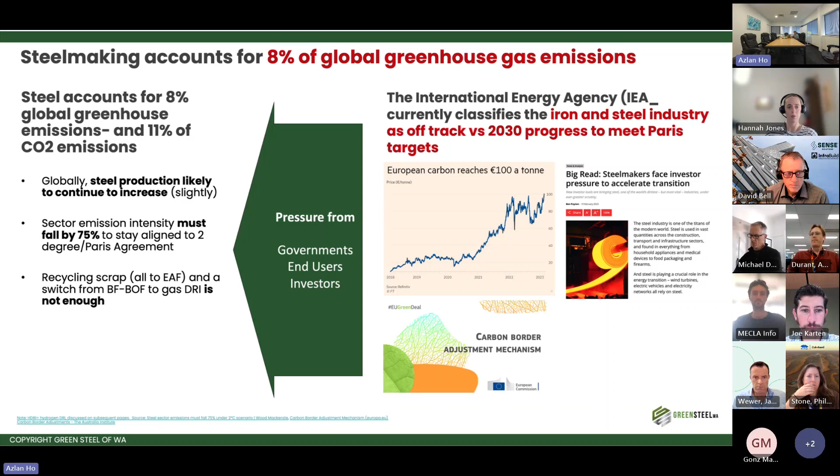I think everyone on this call is pretty much here for the same reason, that steel is a fairly significant contributor to global CO2 emissions, and it's a very difficult area to fully decarbonize. So I think we're all here because we agree that something needs to be done, and it is a challenge. So I probably won't spend too much time on this.

The other interesting little fact is that Australia actually plays a significant role in global CO2 emissions. We're the largest exporter of iron ore in the world, and our iron ore actually results in over 1 billion tons of CO2 production every year.

One of the interesting things was, I think, one of the large iron ore producers in Australia potentially produces more Scope 3 emissions than the LNG exporters, or a comparable amount. We're very focused on Scope 3 emissions from the resource industry, but it's interesting that the Scope 3 emissions from iron ore aren't that far off from Scope 3 emissions from gas exports.

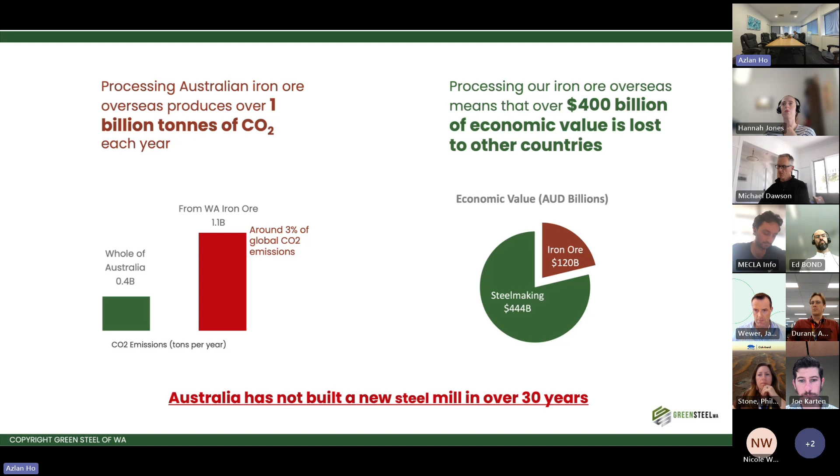But maybe on the other side, it's both a problem and an opportunity. The $100 or so billion of iron ore that we export every year becomes $600 billion of steel, which means that someone else is deriving $400 billion of value. So I'm not saying we'll get it all, but even some of that would be pretty significant to the country. And the steel industry has probably sort of stayed the same for a long time, I think for the last 3 decades.

So the next thing I was going to go through was some of the pathways and the ways that we can get to reducing steel emissions. So typically the simplest way to reduce steel emissions is to recycle as much as we can. I know it's not the solution to the whole problem, but the technology is there. You can produce steel with very low emissions through recycling.

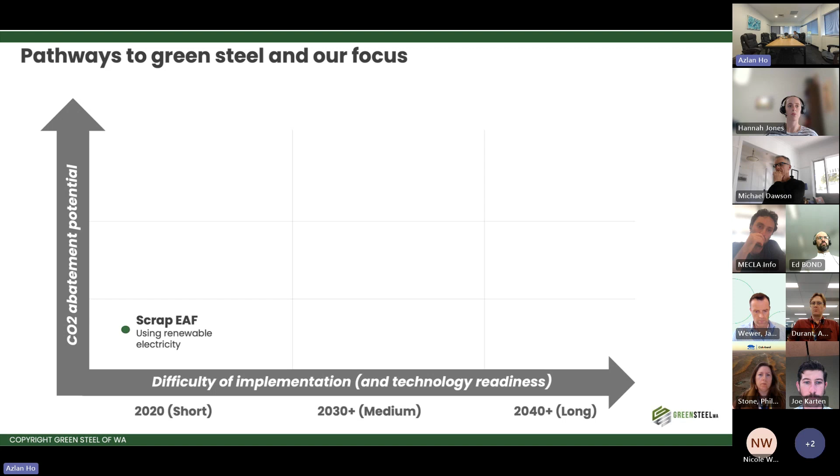And there are other benefits from recycling as well. Besides reducing emissions, you also end up with less mining, less energy usage overall. So again, it's a relatively easy but not a big step. And then the next thing out there is using existing DRI technology, either with gas or hydrogen or CCS in the middle. And that's, again, proven technology. It has the potential to make a bigger impact than recycling, especially in Australia.

But it also isn't the whole solution, because while there are quite a lot of magnetite resources which can be enriched to support existing DRI technologies, it doesn't solve the big Pilbara problem, which is the nearly 1 billion tons of hematite that we export every year. And that comes with the technologies that are coming, like the electric smelting, solution electrolysis that Fortescue and Element Zero are pursuing, and then there's molten electrolysis, which I think Boston Metal and some others are doing, and probably some other ones that we've never heard of, but I think they're a little while away. They're very, very important.

I think they're the solution to everything, but they're probably quite a while away, because they're still at best in pilot stage. Some are not even there yet, and so there's quite a while to go. We think probably a decade plus before they get to a decent commercial scale. So we're currently focusing on the stuff that's already there and done. So we're not here to solve the world, but just to take a step forward and do something that makes sense.

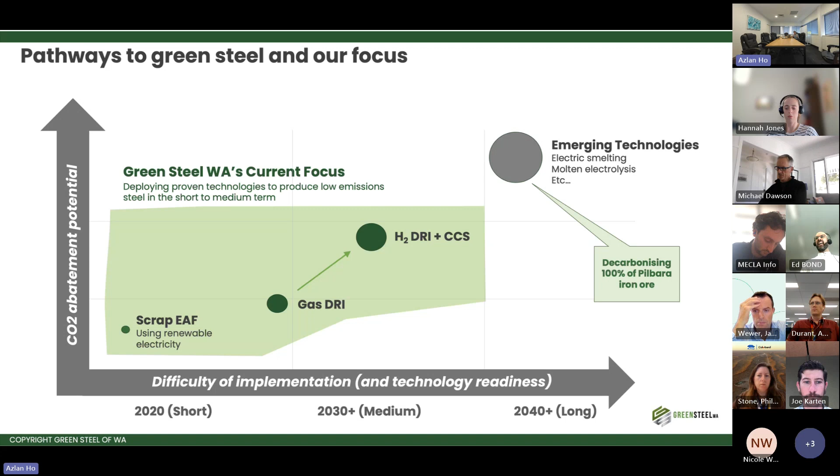I guess overall, all of these things need to stack up economically. So we're working on the principle to find a way to make these work within the current environment, and then to set the scene for the next few things. So off the back of that, we've got our Collie steel mill. That's a 450,000 ton a year steel recycling mill producing rebar in the town of Collie in Western Australia that I'll tell you more about.

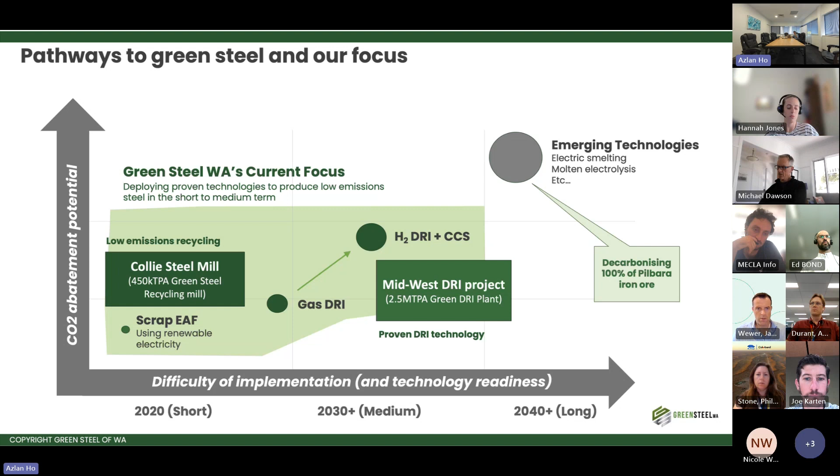And then our Midwest DRI project. Both of these projects, we've been working with Danieli on, using their MIDA mini mill technology and then their Energiron DRI technology. So the first one is Collie. We've been working pretty closely with the state government, who funded a lot of the development of the project. So we're fully funded to FID.

As far as technology goes, it's very new and advanced and interesting in steel terms, but it's also just a copy of something else. So I have to admit, we're not by any stretch a technology company developing cool stuff. We're literally just taking what someone else has done and repeating that. But the converse of that is that there's minimal technology risk, and it's hard enough just to get one of these off the ground without technology risk. I can't imagine trying to do this with technology risk. I don't think I'd survive.

Being an electric arc furnace mill using continuous casting and rolling, we're expecting it to be the lowest emissions or cleanest steel mill in Australia. We've been working pretty closely with the state government. We've been designated as one of 3 or 4, or maybe there's 5 now, strategic projects in Western Australia, and we're aiming for operation in '27.

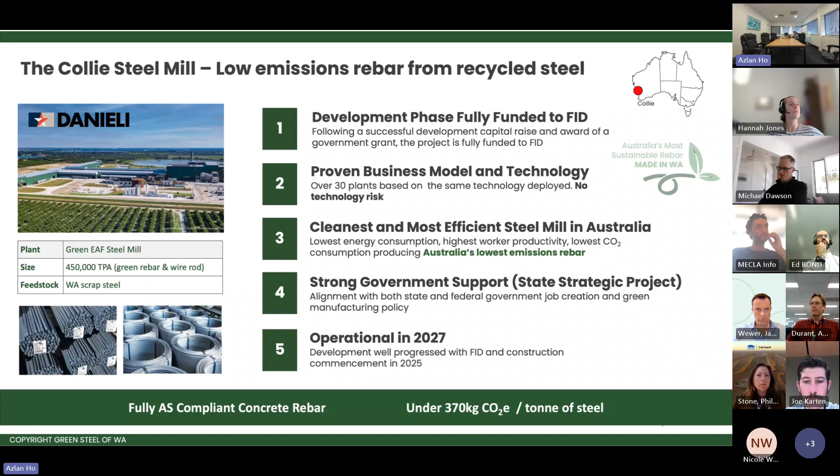Obviously it'll need to be fully AS compliant, and we're pretty comfortable that we'll get below 370 kilos of CO2 per ton. We can go lower, but that'll depend a bit on the market and all the rest. This is assuming a mix of renewables and grid-based power. We'd love to go full renewables, but that's something we'll work through as we go along. We're expecting to start up at this number and then work our way down from there. So yeah, strategic project. Actually, I might blitz through this.

An important thing for us was for the project to be both environmentally and economically sustainable. Having something that is green but doesn't make money is not a great way to start. One of the things we're fortunate with is that Western Australia currently exports all of its scrap steel, and it is priced at overseas benchmarks. So believe it or not, scrap steel is cheaper here than in Bangladesh or India. It's not an enormous difference, but every dollar counts. So that helps.

Having an efficient mill in the middle that we know will work is the second part. And when you combine that with reasonable energy costs in WA, that means we get fairly priced scrap and a good efficient conversion of it into steel. Efficient logistics: over half, and some numbers say up to 70%, of the containers and trains leaving Western Australia leave empty, which is sad and obvious when you think about it. We sell rocks and gas. We don't really make anything here, but we buy stuff. So that is handy from our point of view.

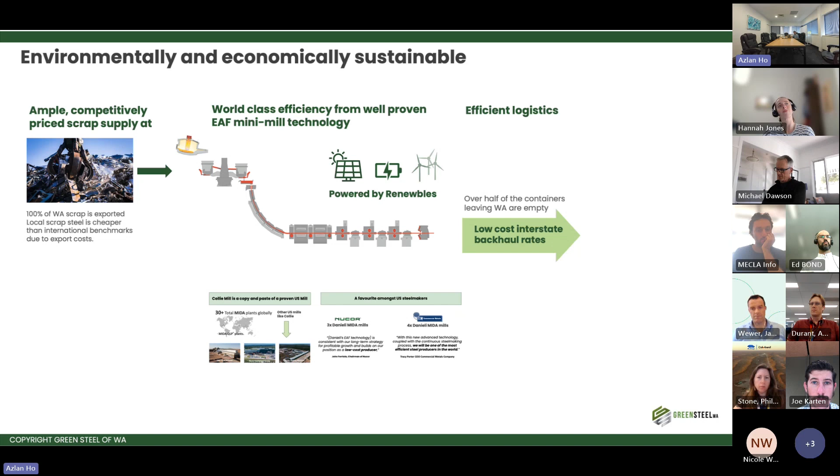It's a lot cheaper to send stuff to the East Coast and even up into Singapore. One of the quotes we got for sending a 40-footer to Singapore was minus $5 or $10. They said they'll basically give you a $10 fuel rebate if you take the container back for them, because everyone's paying to get empty boxes back to where they came from. And all of that allows us to get the low emissions. Sorry, that should be 370, I've just realised. Rebar around Australia at a reasonable cost.

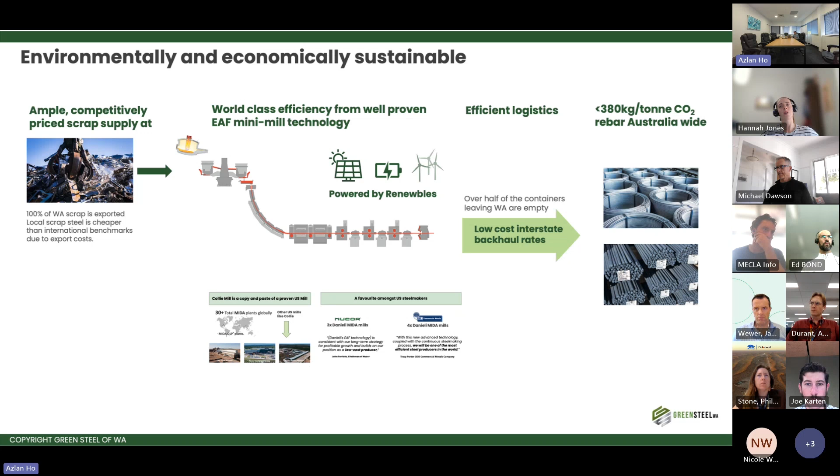So now this is... I hope the sound doesn't come up. Let me find a way to kill the sound.

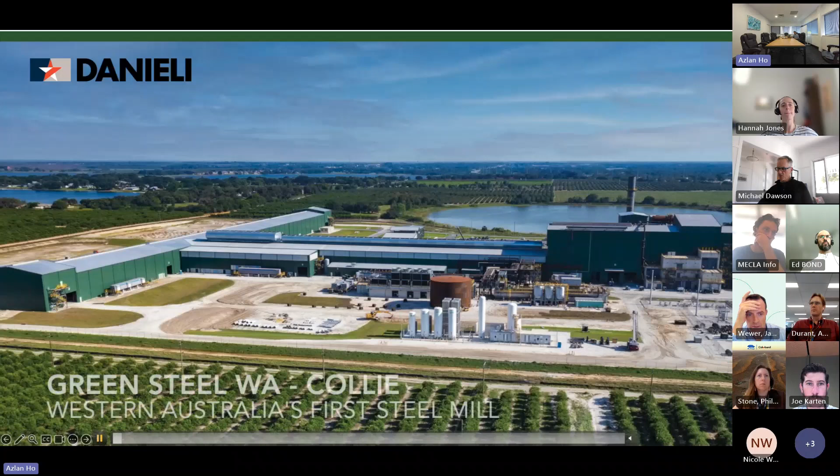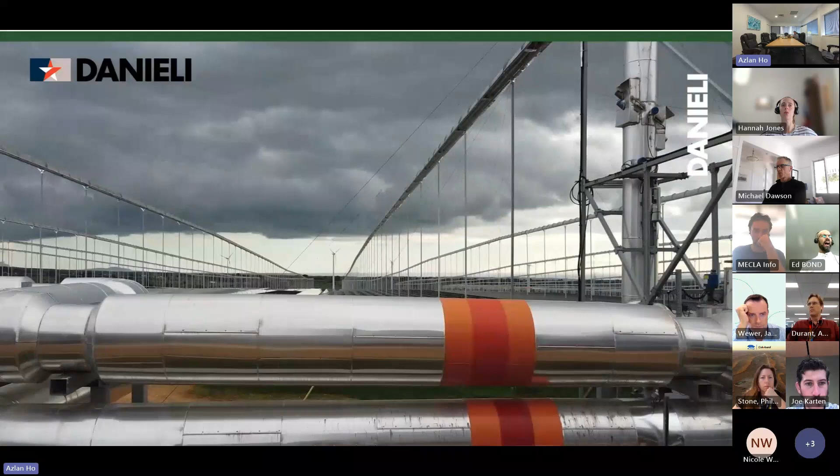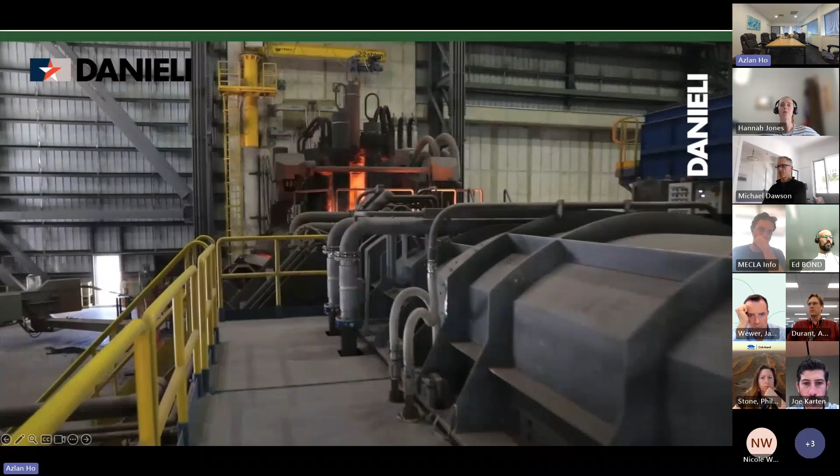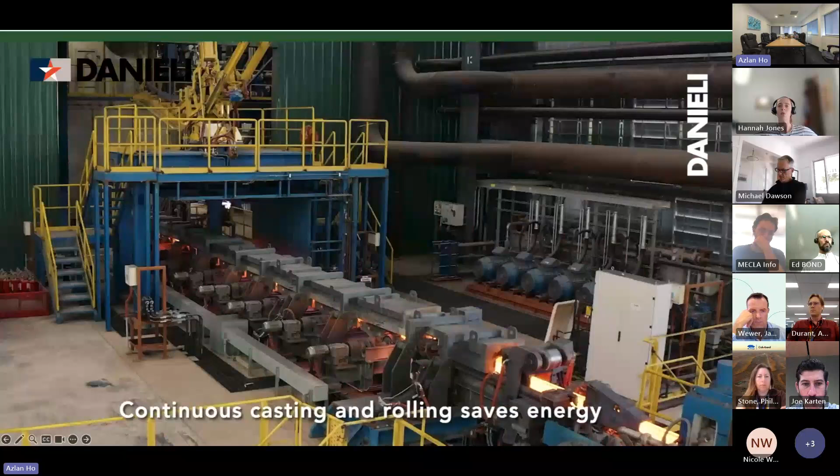So this is a video of Frostproof, which is a Danieli mill in Florida, which Collie will be a near copy of. Sorry, ignore the solar thermal, we don't have that. I had to use a Danieli video. It's one of the modern mills where you feed scrap through a feed conveyor into an EAF, but the main difference the newer mills have now is that they cast a billet and then immediately roll that continuous billet out into a finished product, in this case rebar. So we can produce straight rebar like this.

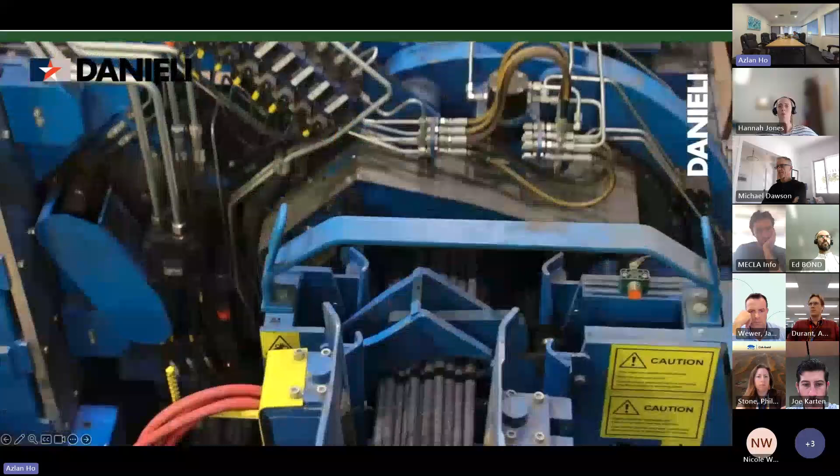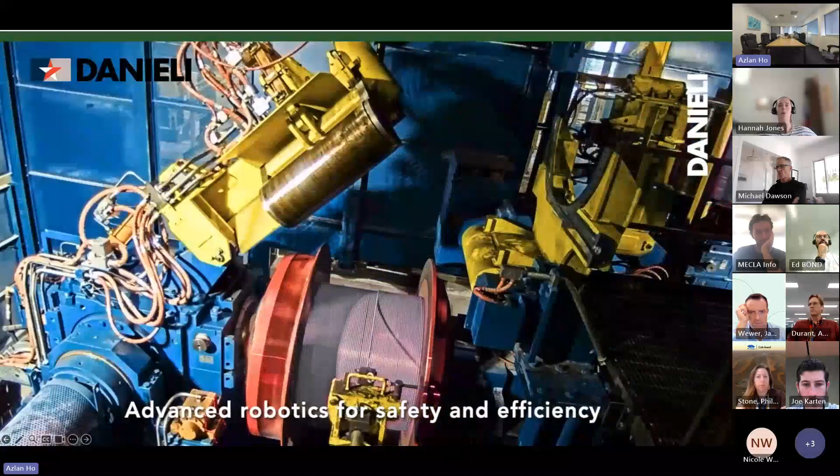But the other product that we're quite excited about is what they call spooled rebar. I must admit, I'm not from the steel industry or the cut and bend industry, and the idea that you can spool rebar up to 24 millimeters still gets me. I still find it pretty amazing. I've got a second video after this that talks to how spooled rebar leads to very efficient cut and bending operations.

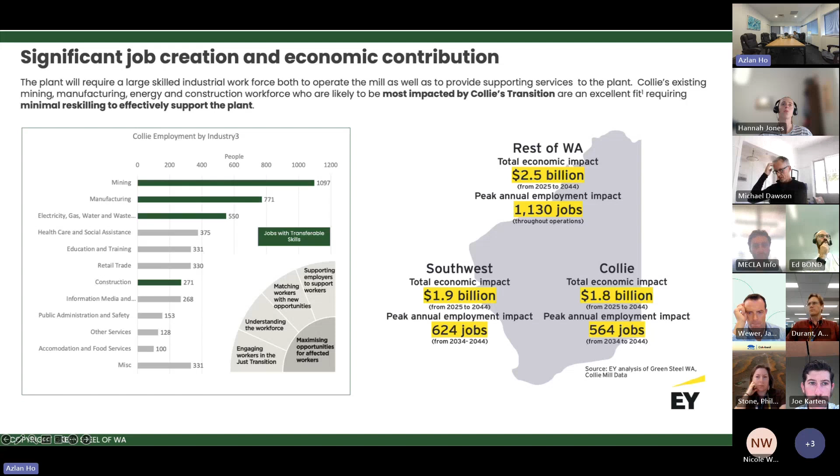And so the other, I guess we've also had some economic studies done by EY on the benefits of the mill, and I guess its jobs and a fairly significant contribution to the state's economy. One of the things that I talked with Joe about was that Collie is an interesting convergence of three important themes, I guess.

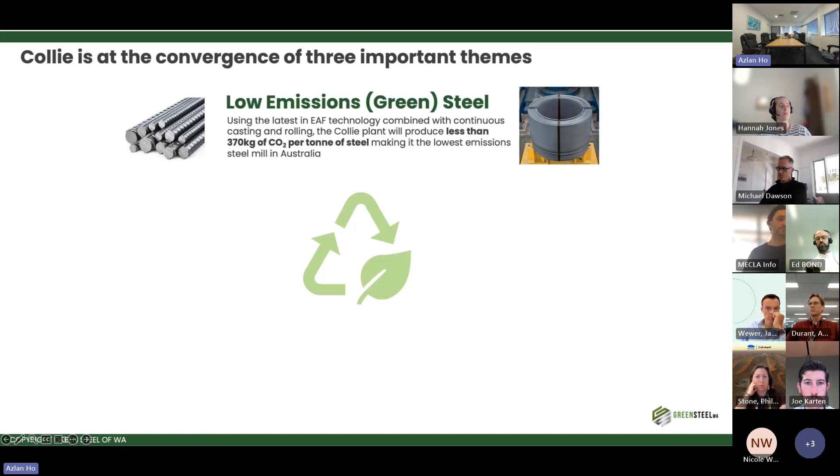There's obviously low emissions steel or green steel that we've all talked about, but being a recycling mill, there also is a strong circular economy theme. I mean, we've never recycled steel in Western Australia. We export everything, so it'll be quite a change. So that's something that is pretty exciting here. But the other bit that

I don't know whether we've talked about much was, so Collie is sort of like the Hunter Valley of Western Australia. All of our coal's mined in Collie, and that's where all of our power has traditionally been generated. But as part of decarbonisation, the state's planning to close all of the coal-fired power stations and all of the coal mines by 2030. So they're in a bit of a wind down, and it means that effectively, if nothing's done, the town will just vanish.

So we've been working pretty closely with the state on what they call their just transition process, and I think a lot of coal towns all around the world are looking to see how Collie's transition has worked. The Collie transition so far has been a great example of how, with a bit of government help and industry participation as well, you can create the just transition.

So we'll be the first large industrial facility to get set up in the Coolangatta area in Collie, and then following behind us, there's a company called Magnium who are working on a green magnesium smelter, and International Graphite who are looking at setting up a high quality graphite manufacturing facility.

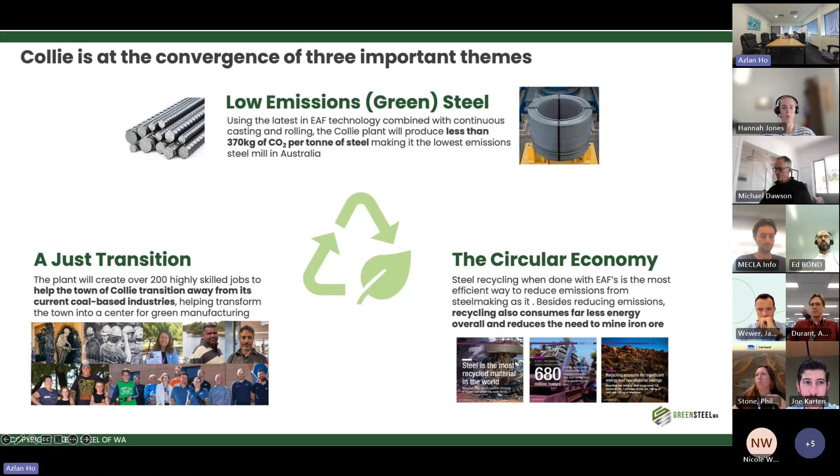And I guess the joke that I said was maybe we'll be like the Big W in a shopping center, and then get the industrial area going, get some of the infrastructure set up, because we'll be building rail and a few other things in there, and then grow, turn Collie into a green manufacturing center.

So in terms of product, we'll be producing the straight rebar that we're all familiar with, in all the usual lengths to the Australian standards, and then spool rebar, which is rebar in coils.

And I think one of the neat things about having a local mill is that local mills offer everyone in the downstream supply chain a more direct connection to the manufacturers, and also the ability to shorten lead times, customize products, a lot of things that we could do, very similar to other local manufacturers. Probably one of the benefits of having local manufacturing. I think it's a fairly generic theme across the board with local manufacturing.

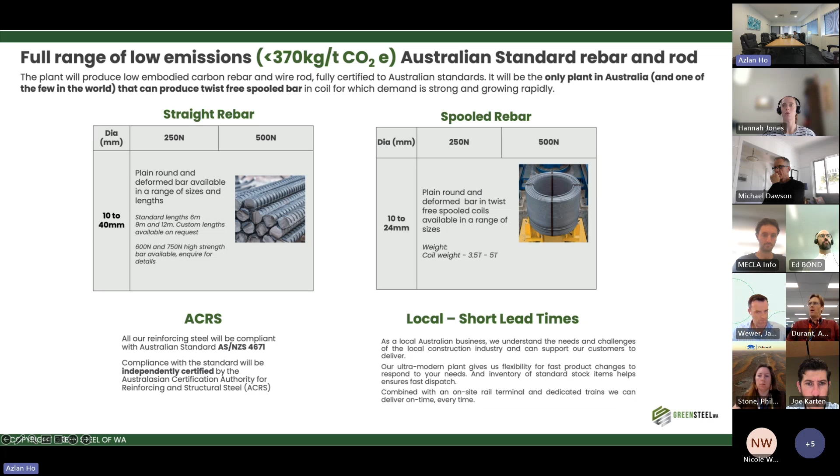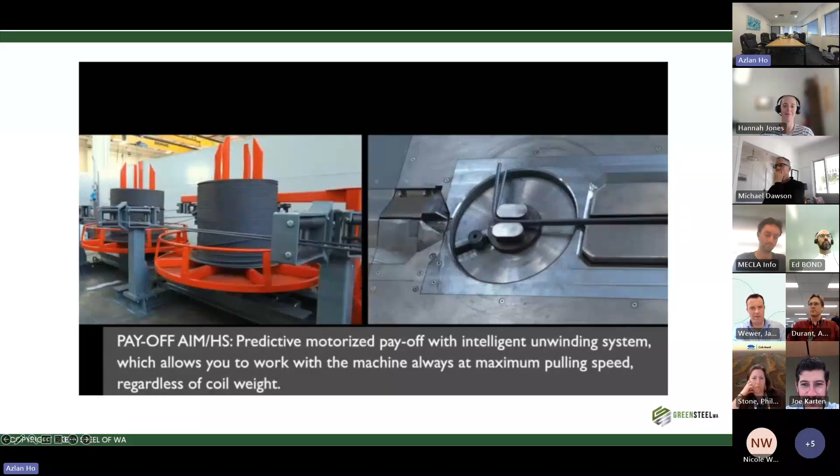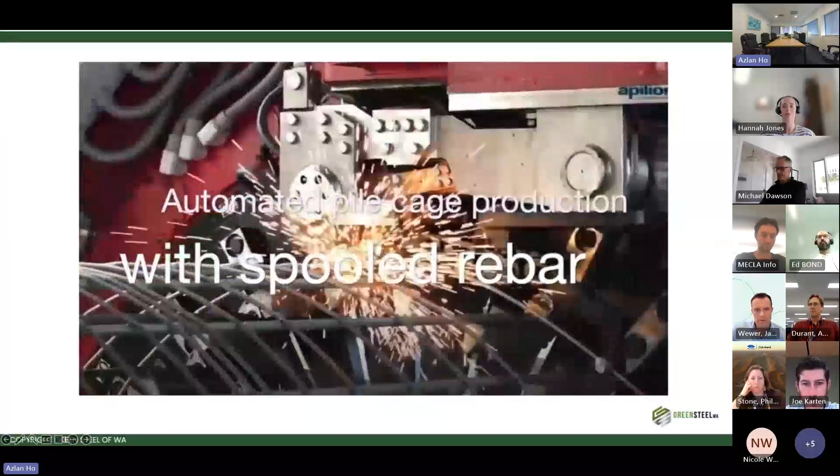So spool rebar is really neat. I'm an engineer and I nerd out on these things. So basically, rebar is put in spools, put through automatic bending machines, and shaped. I think for me, automation is what will help bring manufacturing back into Australia. This is the pile cage manufacturing machine that just peels off spool rebar from spools.

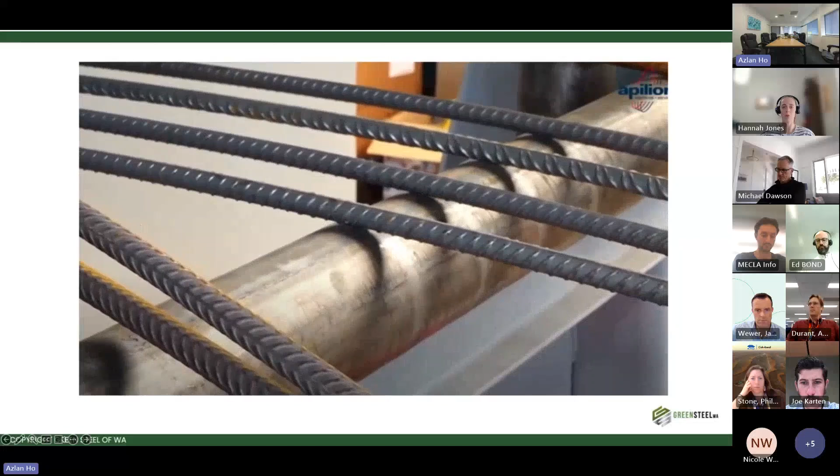I think we are a high labor cost country, and there are many benefits from that, but I think the only way we can have manufacturing here is through automation. So I think spool rebar coupled with lots of automation on the downstream side will help us to create more industry, which then creates more good jobs rather than fewer industries with more lower quality jobs. But that's my personal opinion.

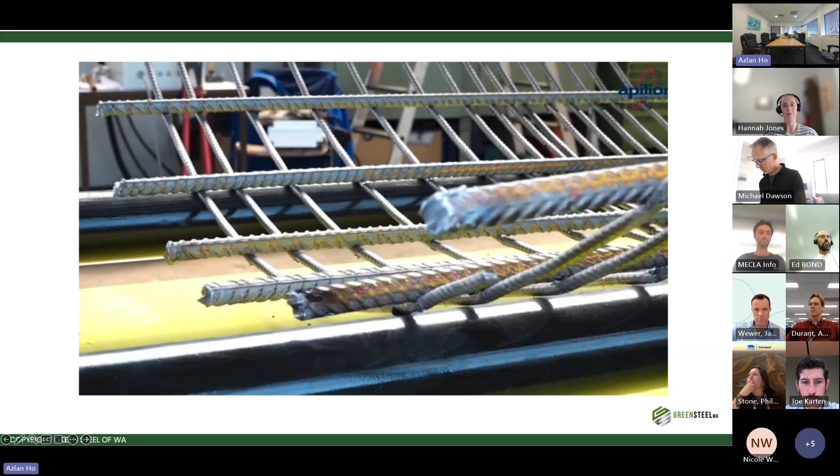So we've been working along for a bit now. I think in about April, we should get the very last of our approvals. We've got our planning, development, and environmental approvals of the plant. Unfortunately, there were some trees on site that we've had to do some things for, but I think that's all sorted now. We're just waiting for our final approval from Department of Conservation, and then that'll be the last of our approvals.

We've onboarded our preferred contractor for the work, and so the next few months will be a mad rush to finish capital raising, sort out all of our supply and offtake contracts, and then into construction in the second half of this year. So with any luck, we'll be running by '27. So that's Collie. I'm going to keep moving along.

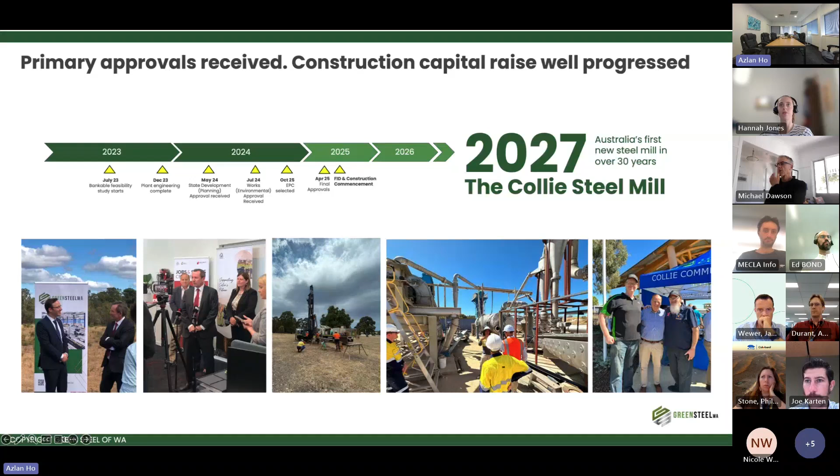How are we going for time, Joe? Do I need to cut short to accelerate? Look, I'd say accelerate if you can. Yep. But this is all very fascinating.

Cool. DRI. So the other project we're working on is a traditional DRI project with Danieli, and again, it's based on proven technology. It's been around for a while. We've partnered up with a company in Thailand, Meranti Green Steel, for the offtake of DRI.

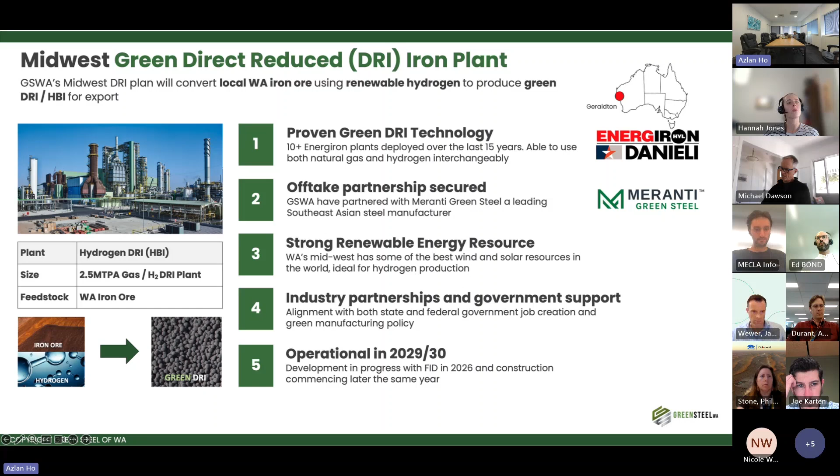They're establishing a green EAF up there, and we've chosen to locate in the Midwest, where there are good magnetite resources. But the good thing about the Midwest is it doesn't have the same sort of cyclonic and general cost challenges as the Pilbara. Weather's a bit friendlier in the Midwest. This is probably much less mature. We're still in sort of a pre-feasibility stage with this project, and so there are a couple of ways at the moment to produce green steel.

One is the traditional blast furnace route, which is where most of the steel in the world is made. But there is a route, and it's been around since probably the late 60s, to reduce iron using a DRI plant, and then you can process that DRI either in a BOF or in an electric arc furnace. The disadvantage of this is that it does require quite specific grades of iron ore, so you can't do this with your run-of-the-mill ore.

I guess there's a belief that there's very little of that ore in the context of Western Australia, but we're currently producing 40 to 50 million tons a year of this stuff across Australia. A very big DRI plant is a 2.5 million ton a year plant. So there is still a decent opportunity there.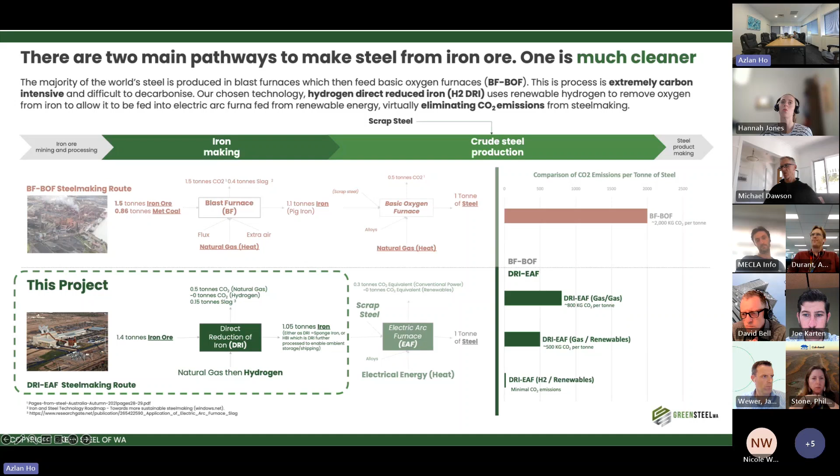And running on natural gas, the plants are actually competitive. They're economic, they do work, and you do get a material reduction in emissions. It can be anywhere from half to a 75% reduction running on natural gas, depending on how you configure the plant. They're economic on gas, and the neat thing about the Energiron DRI is that they're what they call hydrogen ready. Even when running on natural gas, they reform the natural gas into carbon monoxide and hydrogen, which is then used to reduce the iron ore.

So basically, the rough term was unrust. Iron ore is just rust, so they unrust the iron ore back into iron. You can actually run two pipes into the plant, one for hydrogen, one for gas, and swap back and forth between them. The limitation is not upsetting the process, but as long as you take more than a couple of days to swap from gas to hydrogen, there is no problem at all. So we're taking the view: start one of these on gas, and then bring in green hydrogen progressively.

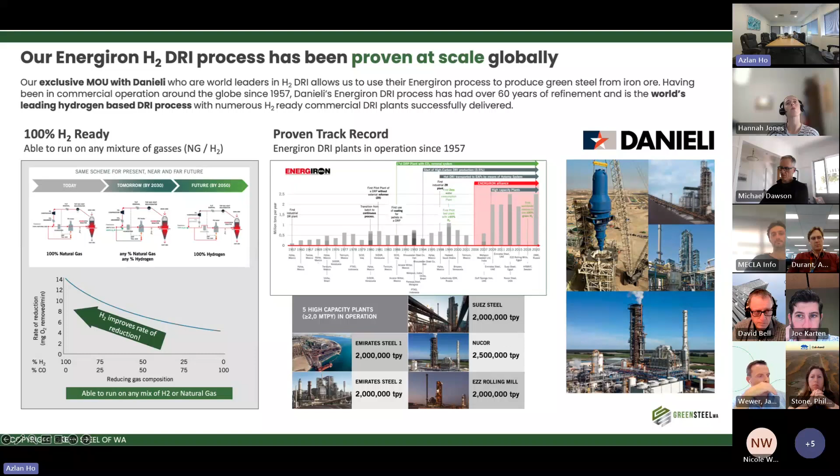They've been around since 1957, which was the first one. Energiron are the second largest technology out there. Midrex by Kobe Steel, the competing technology, have more plants. Between them, they have a lot of running plants, most of them in the Middle East, where natural gas is extremely cheap. But there's no real reason why you couldn't get one of them up here, aside from the effort of standing up a project.

Besides making a start on producing low emissions iron, we think this is an opportunity to kickstart a green hydrogen industry as well, because one of the challenges with green hydrogen is export. To export green hydrogen, you need very large scale storage, export facilities, infrastructure, ships and all the rest, and that is massively expensive. You're much better off using the hydrogen onshore right next door. That alone will take billions out of the capital expenditure of a hydrogen facility.

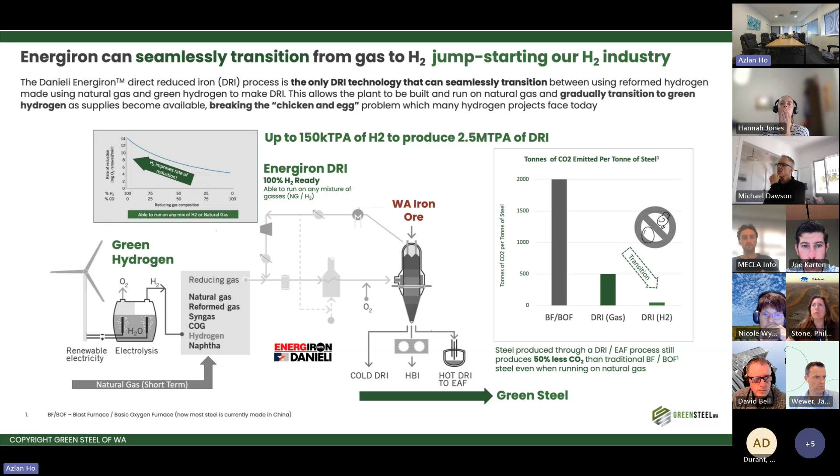In terms of scale, a 2.5 million ton a year DRI plant would consume about 150 kilotons a year of hydrogen. I think that equates to roughly 3 and a bit gigawatts of generation, which is not far off what the whole of Western Australia uses. Granted, we're not a big population state. And so we partnered up with Meranti.

What we're aiming for is to target the automotive industry. That seems to be the industry that's happiest to pay a premium for lower emission steel. Some of it's just simple math: steel makes up less than 0.25% of a car, probably even less for an expensive car. And I'll bet you they'll charge you at least that and then some for the privilege of having a car made from green steel.

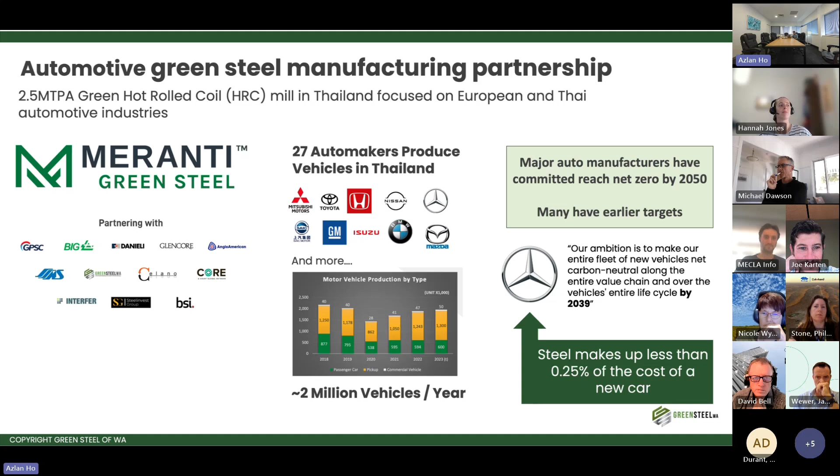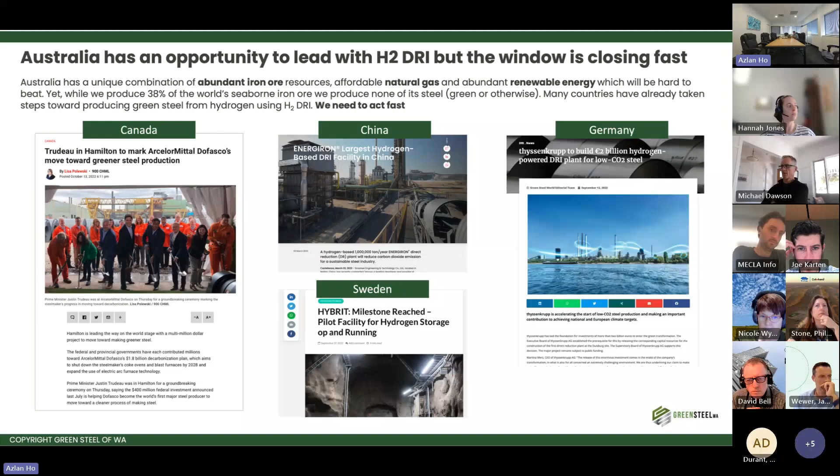Our concept's not new. ArcelorMittal are doing the same thing in Canada at Dofasco. China's done a few of these plants. The natural gas DRI plants that are hydrogen ready are popping up all over the place. And they make sense; it's something we can do now. It does reduce emissions, and whether or not you go to green hydrogen doesn't affect the actual investment in the project. So cool, that was it.